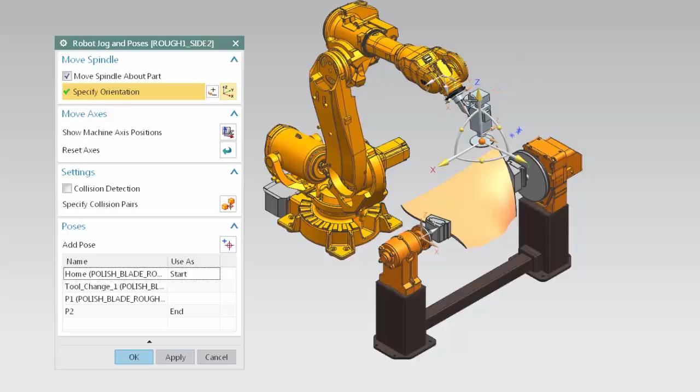Previously, you were required to create a user-defined event and manually enter numeric values copied from the Machine Axis Positions dialog box, which was difficult and time-consuming.

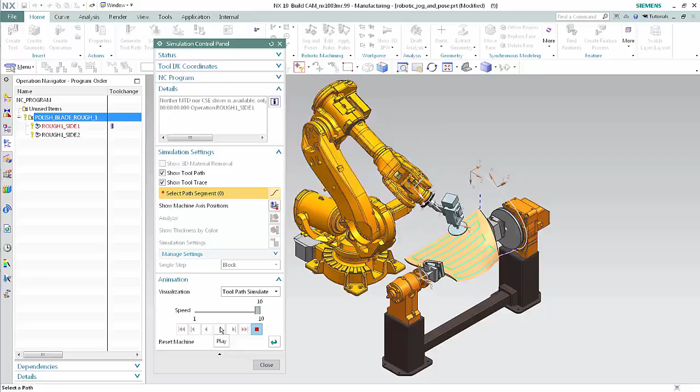We'll begin by simulating the robotics machine tool. Select the robotic program. Click Simulate Machine. Click Play. Both sides of the blade are polished with no collisions or singularities occurring.

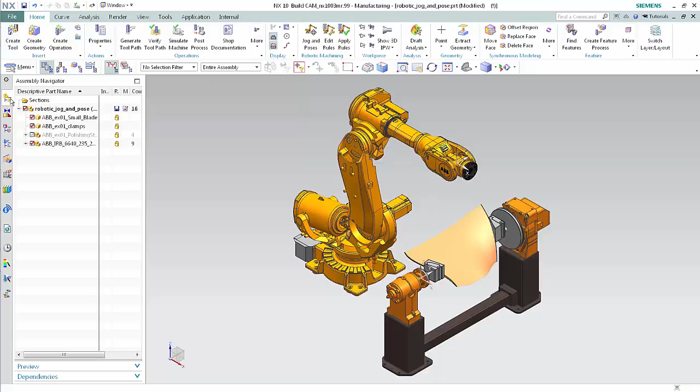Click Close in the Simulation Control panel. Next, we'll view the existing poses. Select the Assembly Navigator tab. Select the Polishing Station checkbox to display the station. Select the Operation Navigator tab.

With the Polish Blade Rough 1 program selected, click Jog and Poses in the ribbon bar. This is an environment that allows you to jog the robot, including the head, tool, and other devices in the robotic cell, and capture poses graphically.

Previously, the Move Spindle, Move Axes, and Settings options were displayed only in the Preview Motion dialog box of the Machine Tool Navigator. Now these options are also displayed in the new Robot Jog and Poses dialog box along with the new poses list. Because a program group is selected, all defined poses are listed whether or not they're used in an operation. Notice the Use As column is blank.

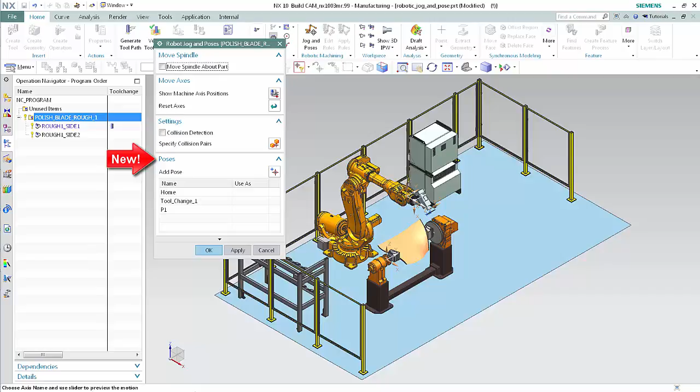Previously, the head holder and tool were not displayed on the machine tool. Now the head holder and tool used by the selected operation, or the first operation in the selected group, as in this case, are displayed.

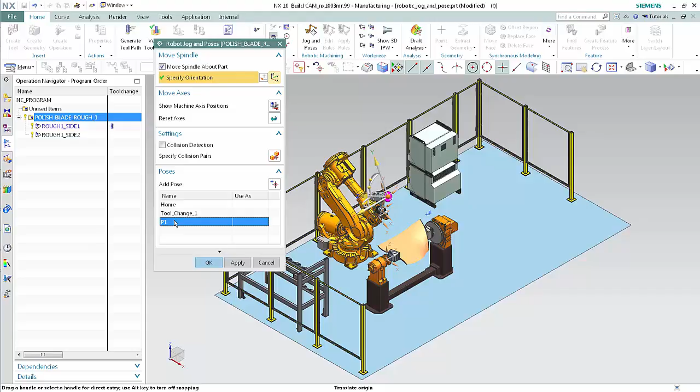Select the Move Spindle About Part checkbox to display the graphics handles. Select Tool Change 1 in the Poses list. Tool Change 1 positions the head near the rack. Select P1 in the Poses list. P1 positions the head above the part. Click OK in the Robot Jog and Poses dialog box.

Now we'll add a pose to an operation. Poses may be added when a program or operation is selected. Poses cannot be added if an object in the Operation Navigator is not selected. In this example, we'll add a pose when an operation is selected.

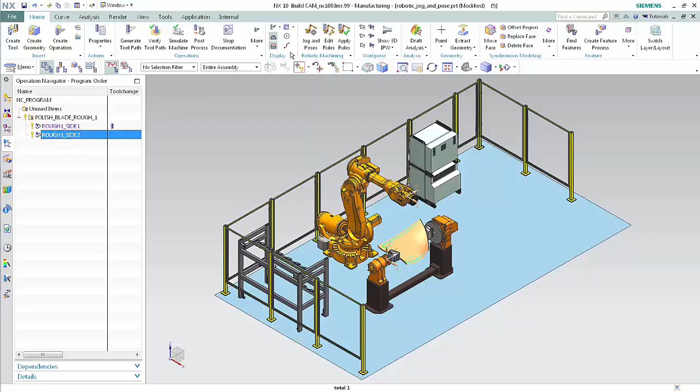Select the Rough 1 Side 2 operation. Click Jog and Poses in the ribbon bar. Select the center point of the hole on the top face of the positioner. Select the Z arrowhead and the top face of the positioner. Drag the arrowhead up a distance of approximately 300.

Click Add Pose. Type P2 in the name column and press the Enter key.

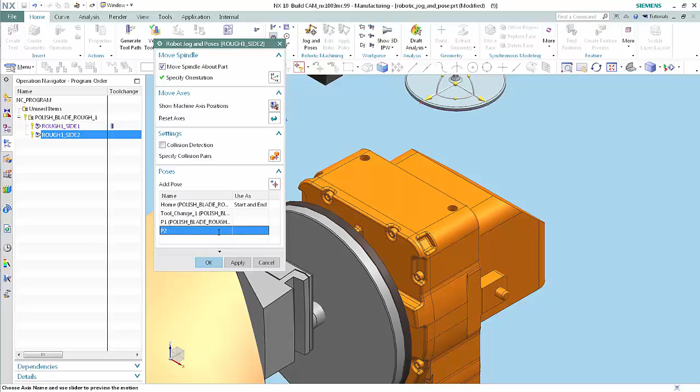Next, we'll use the pose. Poses may be specified in operations as Start, End, or Start and End. Notice that the home pose is currently used as Start and End for this operation.

Right-click P2 and select Use as End Pose. Home is now specified as the Start pose and P2 is specified as the End pose. Click OK.

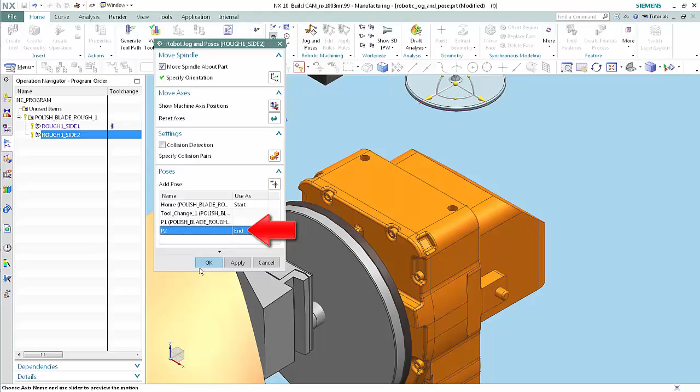Click Apply Rules. Click OK in the Toolpath Processing dialog box.

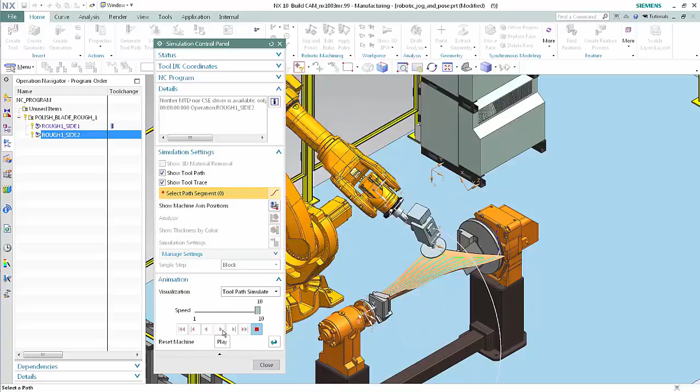With Rough 1 Side 2 still selected, click Simulate Machine. Click Play. The toolpath ends at P2. Click Close.

Now we'll edit a pose used by multiple operations. You may remove, rename, or update poses when a single program or operation is selected. When a program is selected, all operations in that program that inherit the edited pose are affected. When an operation is selected, you may only edit poses that were defined locally and used by that operation alone. A pose used by multiple operations, that is, one that is inherited from a parent object, cannot be edited when an operation is selected. In this example, we'll edit the home pose, which is used by both operations.

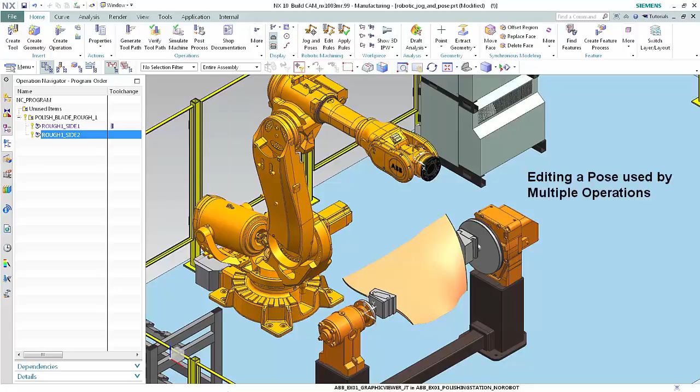To do this, we'll select the program containing both operations. Select the Polish Blade Rough 1 program. Click Jog and Poses. Select Home in the Poses list.

Rotate the head about the XC axis approximately -35 degrees. Drag the Z arrowhead approximately 100. Right-click Home and notice that you can remove, rename, and update the pose.

Select Update. Click Yes in the Edit Poses dialog box. Click OK in the Robot Jog and Poses dialog box.

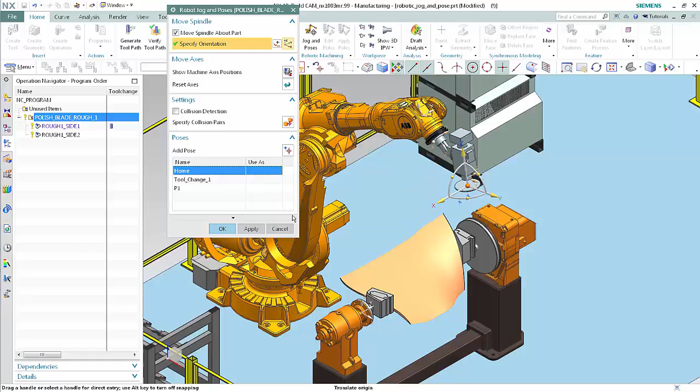With Polish Blade Rough 1 still selected, click Apply Rules. Click OK in the Toolpath Processing dialog box.

Now we'll see how the home pose has been edited for both operations while still being used as start and end in the Rough 1 Side 1 operation and start in the Rough 1 Side 2 operation.

Select the Rough 1 Side 1 operation. Click Jog and Poses. Select Home in the Poses list. Notice that the home pose is at the position and orientation you specified and is being used as the start and end for this operation.

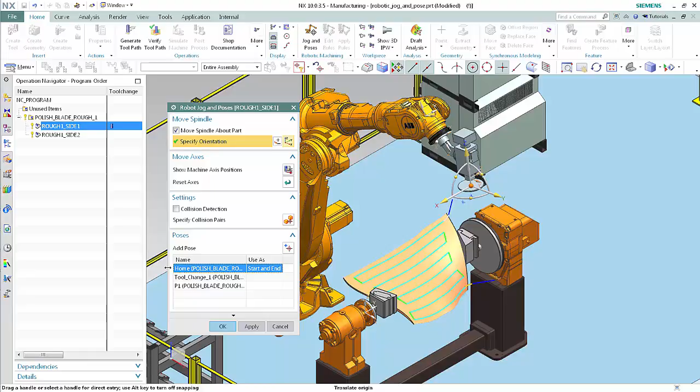Also notice that P2 does not appear in the Add Pose list for this operation. This is because P2 was created inside the Rough 1 Side 2 operation. Click OK.

Select the Rough 1 Side 2 operation. Click Jog and Poses. Select Home in the Poses list. Notice that the home pose is at the position and orientation you specified and is being used as the start for this operation. Click OK.

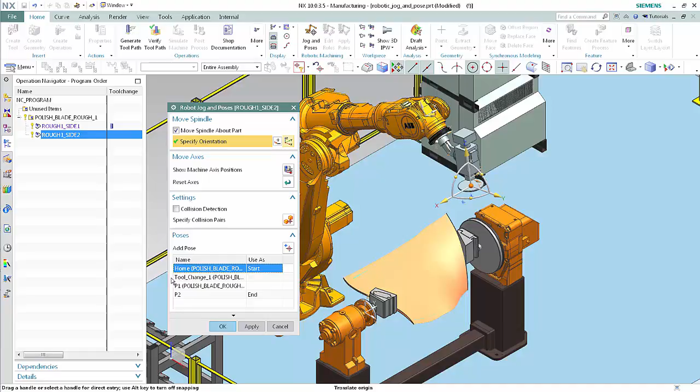Now we'll edit a pose used by a single operation. When an operation is selected, you may only edit poses defined locally and used by that operation alone.

With Rough 1 Side 2 selected, click Jog and Poses. Select P2 in the Poses list. Rotate the head about the XC axis approximately 30 degrees.

Right-click P2 and notice that additional options appear. Because you are editing a pose defined locally and used by a single operation, you can also specify it as a start pose, end pose, both start and end pose, or choose not to use it at all.

Right-click P2 and select Update. Click Yes in the Edit Poses dialog box.

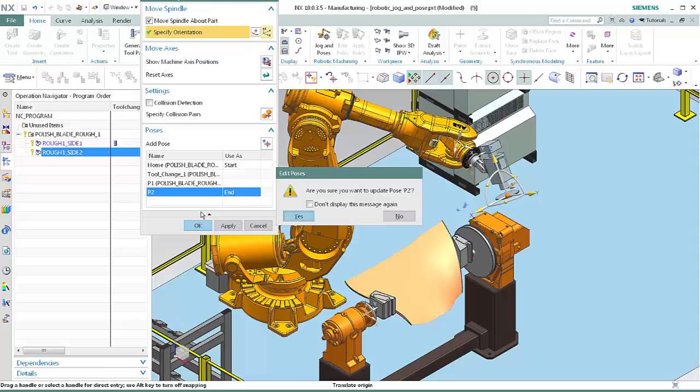Right-click P1 and notice that you cannot edit this pose. That is, you cannot remove, rename, and update. This is because P1 was defined in the parent program.

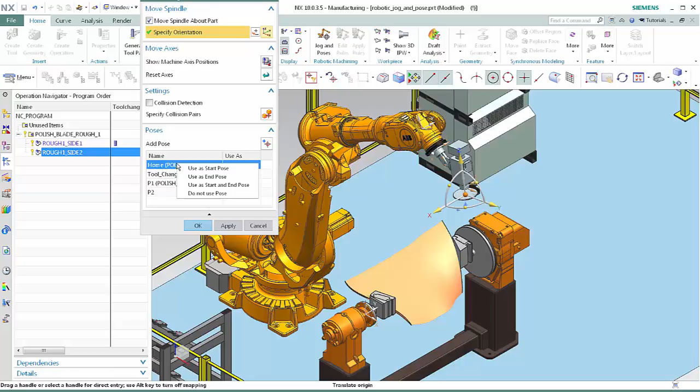Right-click Home and notice that you cannot edit this pose. Again, this is because Home was defined in the parent program. Click OK in the Toolpath Processing dialog box.

This concludes the demonstration of how you can graphically jog the robotic arm and easily define machine poses. Thank you.